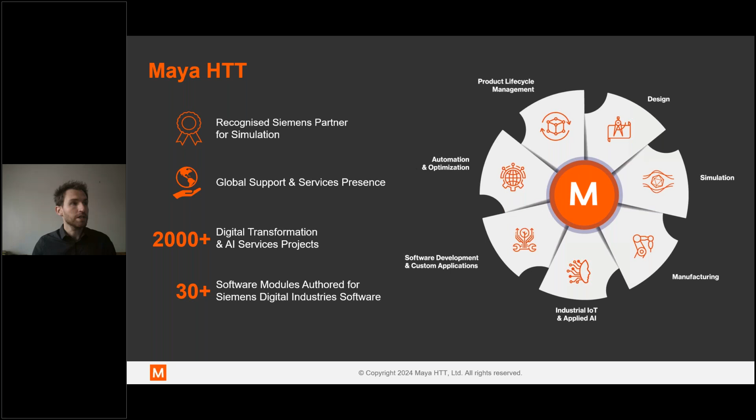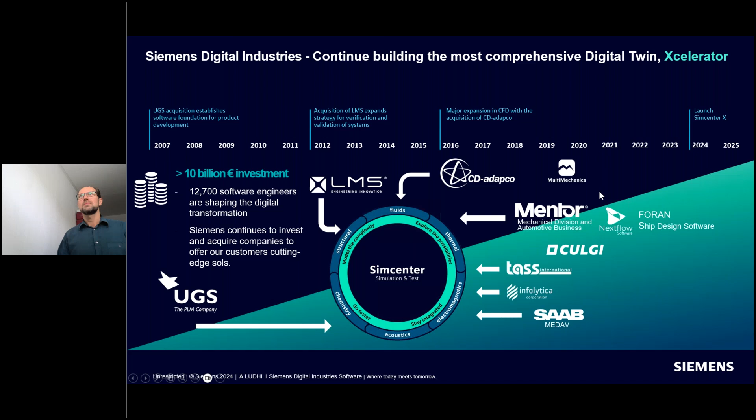For some reason it doesn't work. Let me see what I can do this way.

I would like to say a few words about the market trends and also the challenges of the maritime industry. So the first thing is about the global challenge that we experience in the maritime business.

In July 2023, the International Maritime Organization, which is the special agency of United Nations, committed to a new strategy. According to this strategy, by 2050 we have to make the entire global maritime industry zero emissions.

It's quite a significant technological change, because scaling up and using these new technologies for the entire global industry is not an easy task.

Just to illustrate this, if you ask yourself how many vessels are actually sailing on the planet at the moment, the answer would be about 100,000 vessels of gross more than 100 gross tons, and about 50,000 vessels with more than 1,000 gross tons.

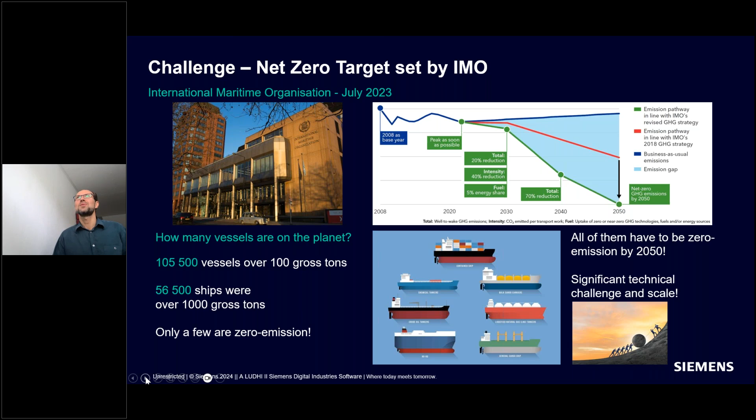At the moment, only a few of those vessels are actually zero emission. So it means in the next 20-25 years, it's going to be quite an interesting and challenging process to completely change the future of maritime business and update all these existing vessels and do something about this.

As you're probably aware, the general process of shipbuilding starts with the inquiry, and there are quite significant blocks which go all the way to the in-service support.

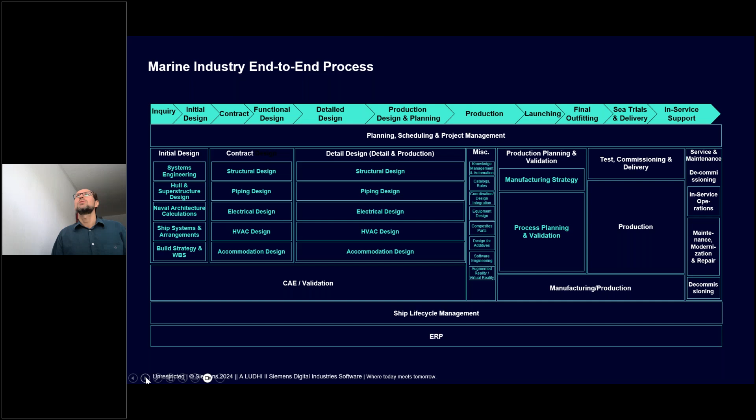Because digital technologies in shipbuilding were introduced quite some time ago, now for almost every part of this process - the initial design, the contract, the detailed design - there are some sort of software packages to simplify this kind of process.

Within the Siemens portfolio, we have all the tools needed for the entire process - for the PLM solutions, for the global overseeing of management processes, and also for the detailed design and simulation. So in that sense, Siemens is in a very good position, we can cover all the blocks of this process.

But probably the most important bit is actually to have the seamless integration between those components. It's not like pieces of software from different vendors, where you might be challenging to move a file from one piece to another. It's kind of an integrated, fully integrated approach.

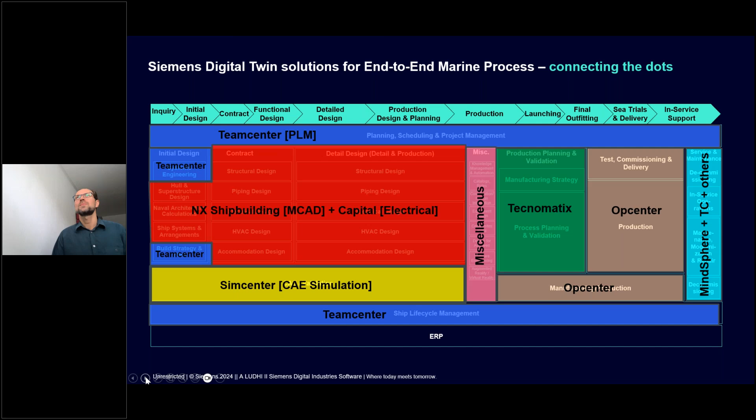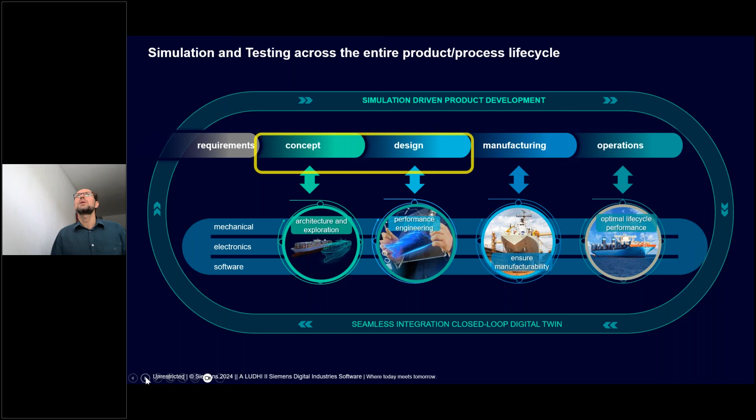If we just rearrange the same image in blocks, there are a few main steps: requirement, concept, design, manufacturing, and operations. In the simulation part, we mainly focus on the concept and design - that's exactly the area of expertise which could be used with the Siemens simulation portfolio.

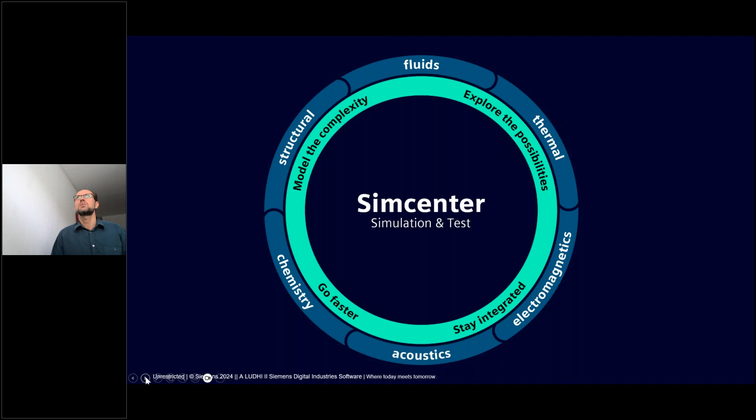This portfolio is specifically part of the Siemens solutions called Simcenter, and is mainly focused on simulation and test. This could be fluid dynamics - computational fluid dynamics simulation - it could be structural, thermal, or acoustic. All this part of the simulation process could be united in Simcenter.

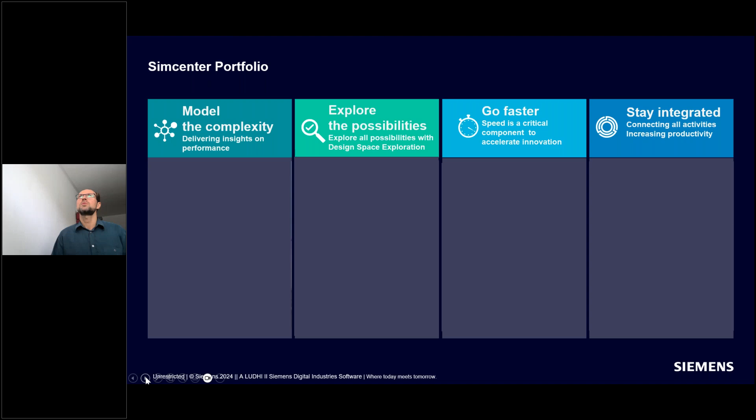We would like to highlight a few main blocks of this portfolio - why it's important to make the simulation process part of the shipbuilding process.

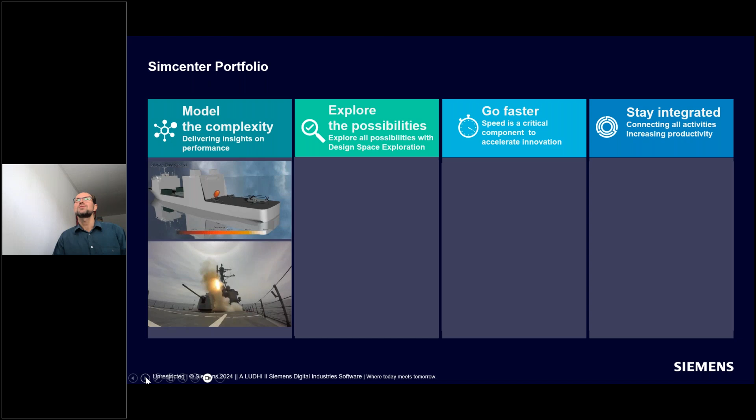The first one is modeling the complexity, because at the moment ships are not simple structures - there are a lot of things happening on the vessel, whether it's the hydrodynamic side, structural elements and so on. So it would be nice to have the opportunity to model this complexity in full.

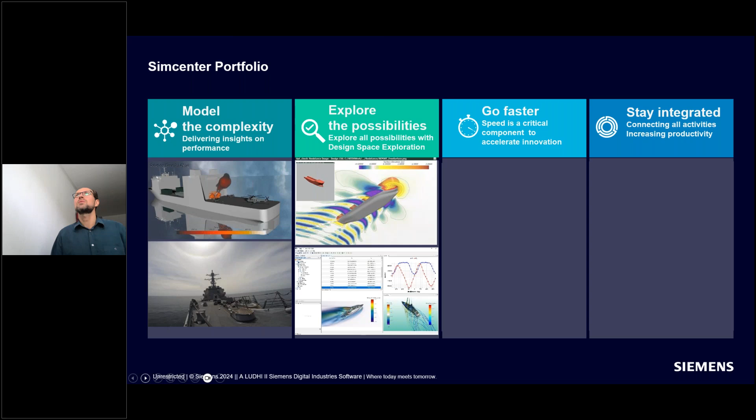The second bit is about exploring the possibilities. This is quite an interesting option for the optimization process - if you would like to have the optimization space and try to find the best possible answer or solution, either in the hydrodynamic side or structural response, and so on.

Another critical bit is being able to run your simulation in a reasonable time frame, because before, simulation could take days or even sometimes a week depending on the complexity. But for the design process, it would be nice to have those simulations delivered in a reasonable amount of time - that's why we have a significant focus on making our simulation robust and fast.

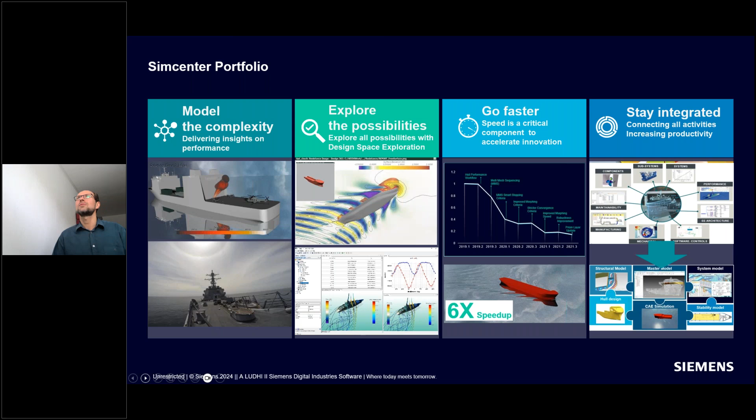This will definitely help engineers run the cases in a realistic time frame. The last important bit is about being integrated. There's opportunity to build the first geometry, for instance in NX, and then use that file across the whole portfolio of Siemens products. So you don't have the headache of converting files from one format to another. It's all connected and integrated, which makes the simulation and the entire process easier.

So that's in a nutshell what I wanted to say about the marine trend, and I'd also like to share a few customer success stories. One is DNV, the Norwegian Classification Society.

They are very good clients of ours, and they use Star CCM Plus to optimize the hull form. In one project they reported a 36% improvement in energy efficiency. That's a quite significant gain, and converting that to financial terms, it's about 3 million saved per year per vessel. So it's one of the opportunities for designers and owners to improve their designs.

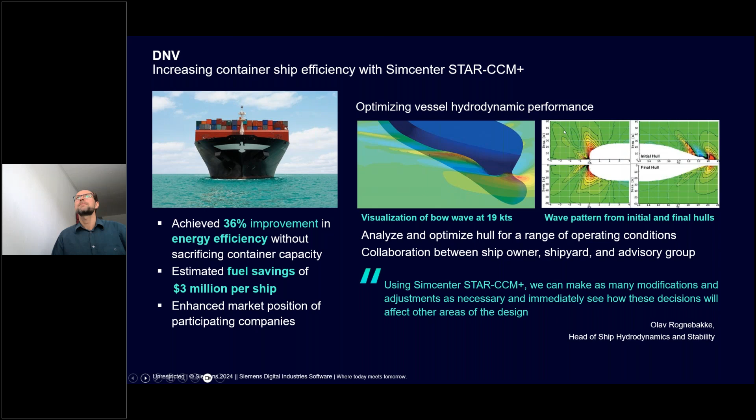The second test case is from Wärtsilä. They had a similar approach using Star CCM Plus, but their focus was not specifically on the hull form, but also the integration and interaction between the hull form and the propeller.

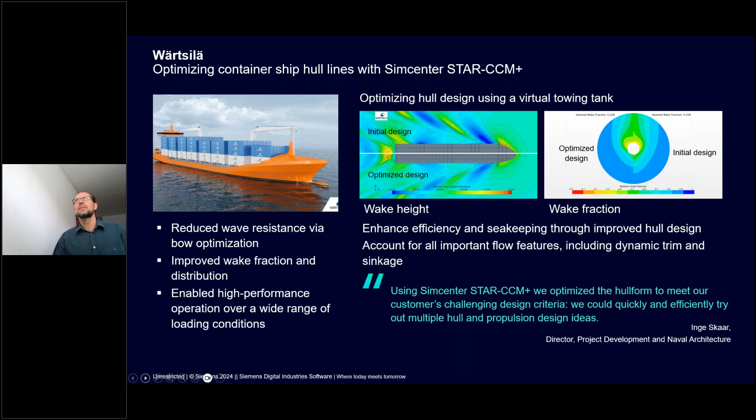It's very important to find the right hull form and propeller together, to get a very good wake fraction, or the wake behind the vessel, to make sure the propeller operates in a favorable condition. So their focus was not only the hull form, but also the integration, running the simulation together with the propeller.

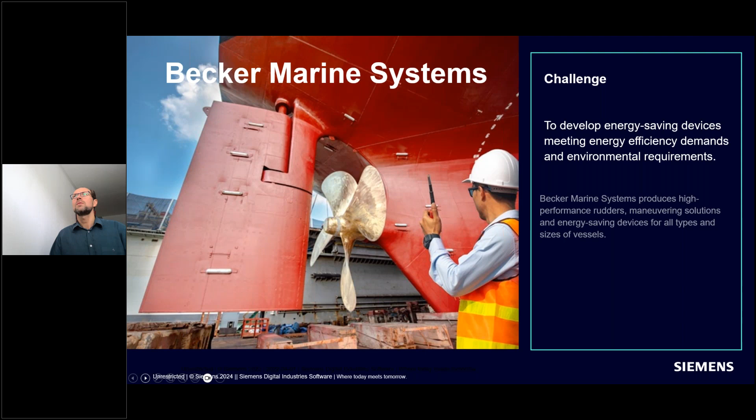Finally, one of the test cases is Becker Marine Systems. They are a very famous brand and company that designs the Mewis duct, a special energy-saving device installed in front of the propeller, which makes the flow coming to the propeller a bit more uniform. By doing that, you can make significant savings in the propulsion system.

As reported by Becker Marine, they achieved quite significant savings, about 0.5 million per vessel for fuel. That's also quite significant, taking into account the small installation time for this unit. We could share a lot more success stories, but we're limited on time, so I'd like to focus on these three I mentioned.

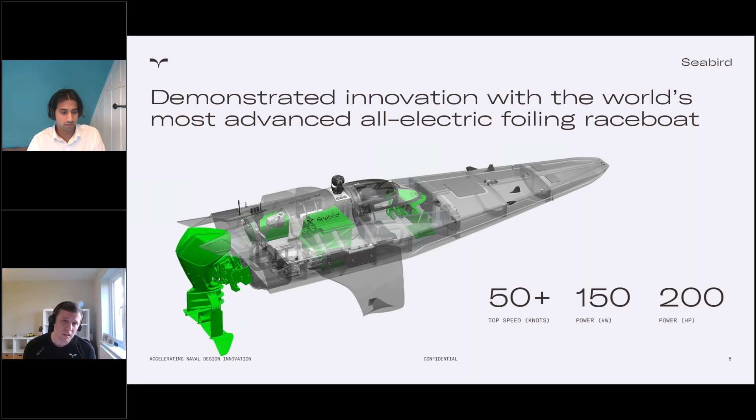It utilizes our 150 kilowatt power unit alongside cutting edge foiling technology to deliver a highly efficient, high performance race boat. The success of this project highlights our team's ability to innovate. Next, we have a little snippet of the Racebird in action, taken at a test site in Italy on Lake Maggiore.

I'm hoping that came through okay. That should have given you an idea of the speed at which the Racebirds perform. And it's our responsibility to make sure that the design can withstand those harsh conditions experienced during racing.

In order to do so, we have to leverage state-of-the-art tools available to us. This outboard engine and foil system is a critical component of the Racebird. Using StarCCM+, we were able to simulate its performance across a range of speeds and turning angles and establish worst cases. We can then analyze those worst cases in more detail to feed into other disciplines, such as providing pressure maps for structural analysis. Iterating through that process has allowed us to develop robust design solutions without compromising hydrodynamic performance.

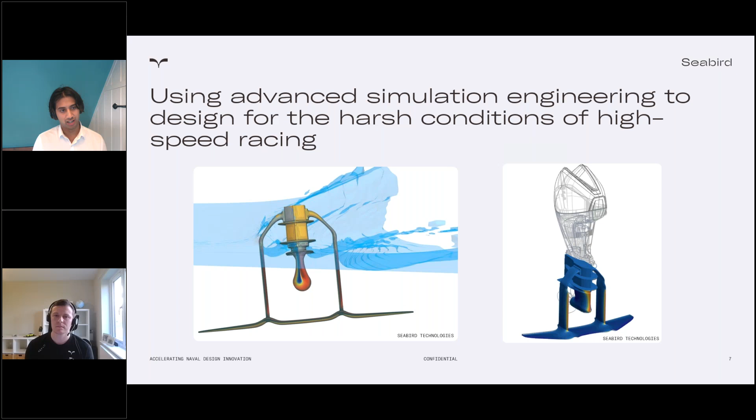Another way we're developing new technologies is through the various Innovate UK projects we've won, partly funded by the UK government. We're working closely with many commercial and academic partners on a range of topics, such as Project Osprey, a UK-Germany bilateral project where we're working with Hacker Motors and the University of Cambridge on developing electric foiling propulsion systems.

Optima is our longest running Innovate UK project, and given its focus on efficiency, has relied heavily on CFD simulations. For Optima, we have simulated a real-life vessel in full scale and been able to validate our results against sea trial data to a high level of accuracy. As you can imagine, a validated simulation has proved invaluable for the development of our project, ensuring that any design changes we make will perform on the vessel with confidence.

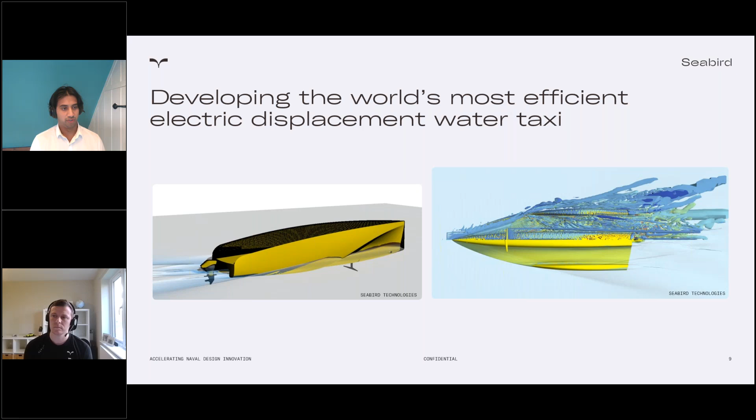At the same time, we're able to control wave conditions and wind speed that we can't control during sea trials. Being able to control where we have the complexity and where we want the simplicity is what makes it a great tool for research projects.

So we talked about the Racebird and the research we're doing, and it's that racing expertise and technical insight that we're using to develop our very own line of commercial products. We're very excited to announce that we will be revealing our first concept product at METS in Amsterdam later this month, which we believe to be the beginning of the next generation in electric systems for the marine industry.

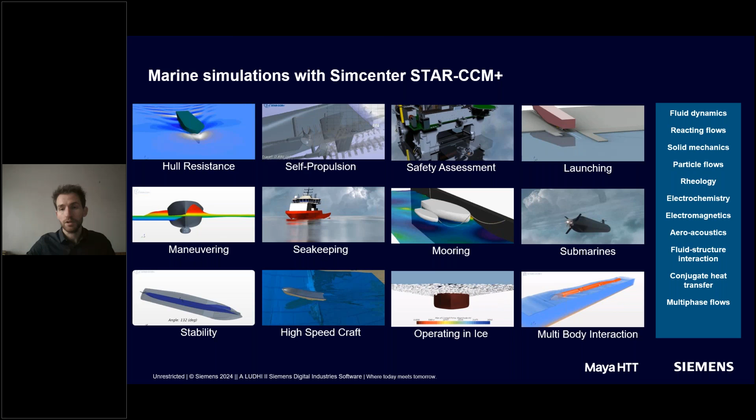As you've understood, StarCCM Plus is our 3D CFD multiphysics tool, which means that you can model quite a wide range of applications. If we focus on the marine industry, that means maneuvering, seakeeping, submarines, high-speed craft, multi-body interactions, etc. There's a wide range of physics, as you can see on the right-hand side of the screen.

Which does allow you to model even more physics and applications in different industries, as you can imagine. If we focus back on the marine industry, we're going to talk about 4 different things here: the standard simulation workflow to model a marine simulation. If some of you know CFD and have used a commercial tool before, you'll be very familiar with that.

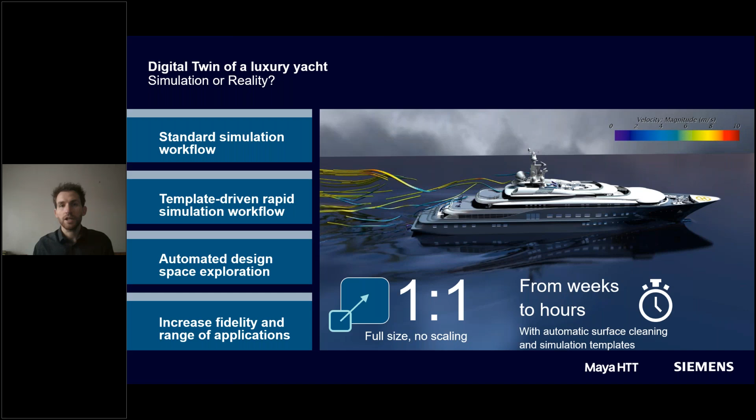Then how you can actually leverage the templating in StarCCM Plus to automate your workflows. Once you've automated it, you can go further and explore your design space and try to optimize and find better designs faster. And then the last point, but not the least, if for some reason you need increased fidelity, for design gateway or for validation and correlation purposes, we'll see how you can also do that in the tool.

Right, so let's jump into the CFD workflow. No surprise there, the first step is the CAD import. We support a wide range of CAD formats in StarCCM+. From there, you have to clean your CAD to make it CFD ready, so you have to get rid of self-penetrating faces and make sure it's watertight, for example.

Once you've done that, you can specify your mesh settings and generate it, check it, make sure it's of high quality. Then you can select your physics solver, your boundary conditions, and you're ready to submit and launch your calculation. The calculation is fully interactive in STAR, meaning that you can check for convergence and monitor your results as the run is happening.

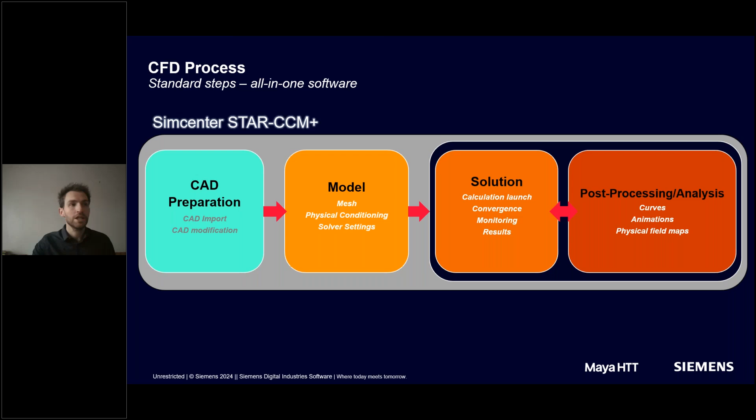Then we arrive at the most important step of the process, which is the post-processing. So where us engineers actually earn our money, because you're supposed to have a look at the results, identify an area of improvement, you come back to the geometry, you make a change, and you rerun the simulation.

So let's see in STAR how that fares. Here we are in the parts tab, where you essentially import your parts and you clean them. Then you define your mesh settings in the mesh operations here, so whether it's a surface mesh, a volume mesh, a boundary layer mesh, and you'll notice quite a few default controls to control the mesh sizes absolutely everywhere within your domain.

So don't be scared by the amount of controls that you can see here. You actually only need to define them once, because they're defined in the operations tab, meaning that you can actually rerun them seamlessly once you've defined them.

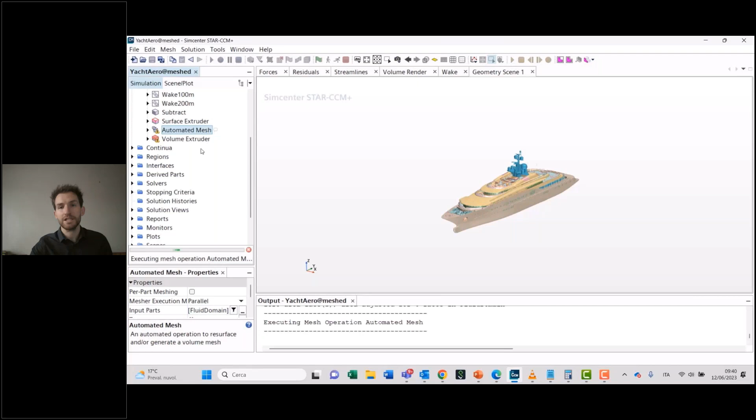From there, you can very quickly create a scene which allows you to visualize the mesh that you've created. So you can potentially create a plane section and have a look at your geometric features, your flow features. In this case, you can see a boundary layer mesh around our hull to make sure that we've captured that correctly.

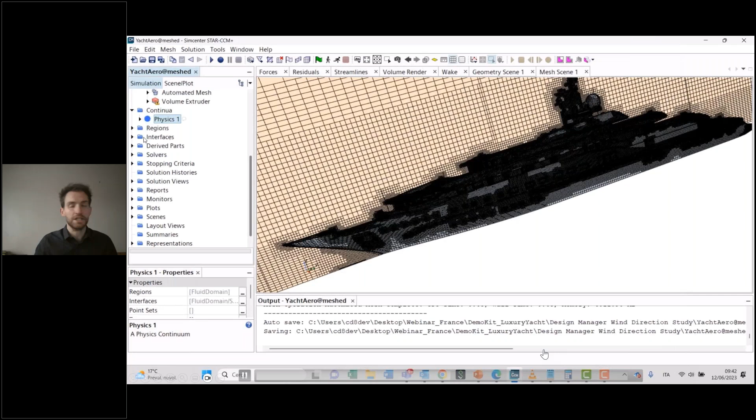Then we move on to the physics solver, so everything happens in that window. It's very easy to tick boxes and select your turbulence model. Is there going to be heat transfer or not? Is that going to be a steady state or a transient? Is that going to be a 2D or 3D case?

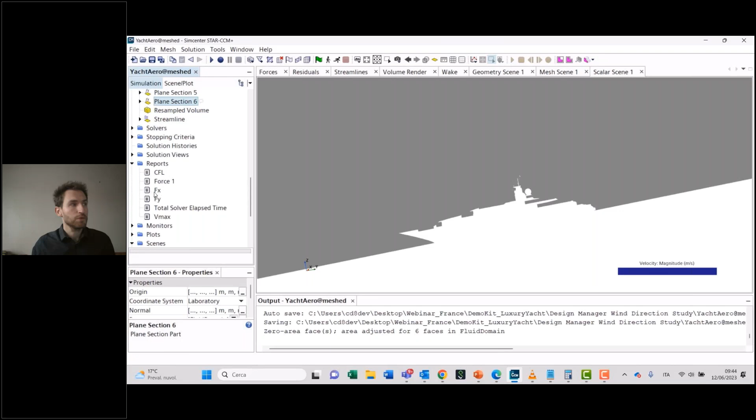We then move on to our regions tab, where we can specify our boundary conditions. So here we have a velocity inlet, a pressure outlet, and a few walls for our geometries. Just before submitting our calculation, we're actually going to do our post-processing first, because the solution is interactive. So it makes sense to realize if something is going wrong at the start of the case, rather than running it fully and realizing that you have to start from scratch again.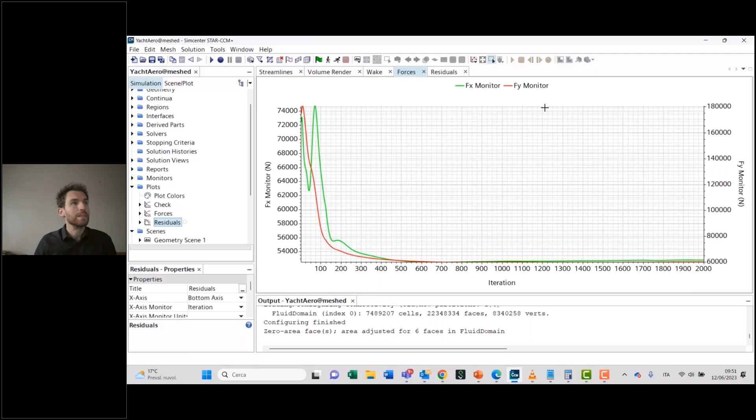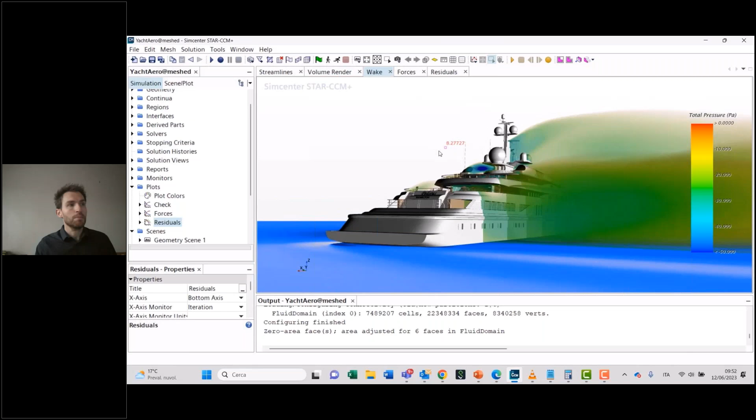Once you've completed your run, you can see on screen a few capabilities in terms of post-processing for STAR, including streamlines, advanced rendering, and ISO surfaces, which give you a fully comprehensive view of what's happening within your case. You may be presenting these results to people who are not CFD experts, so you need to make an impact visually and pass on the message easily. That's what StarCCM+ is really good at as well.

There is one area of the process we've not really covered so far, which is pre-processing. That process can be very tedious, especially in the marine industry, because most customers receive a Rhino part from their suppliers, and this part is very often not the cleanest. Therefore, you have to spend a lot of time manually fixing it yourself. What we've come up with at Siemens is the surface wrapper, which allows you to automate geometry preparation. Let's see how you do that in STAR.

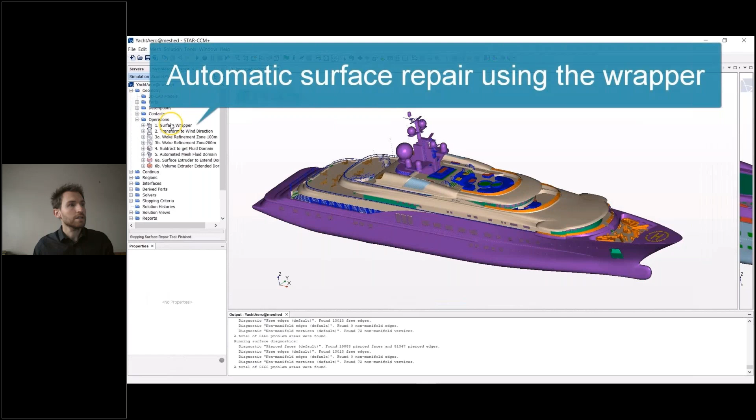You come back into your parts. This time you go into the repair surface tool, which is a pre-processing tool to check for errors in your geometry. Here we're checking and identifying self-penetrating faces, free edges, non-manifold edges, and vertices. We're going to create a new operation in our set of operations called surface wrapper, and we generate a wrap of our surface.

Here we're comparing on the right-hand side the wrapped surface versus the original geometry on the left, and you can see that we've generated a very high quality surface on the right. We can then leverage the deviation distance field function to check how far away the generated wrapped surface is from the original surface, and you can see that it's of very good quality.

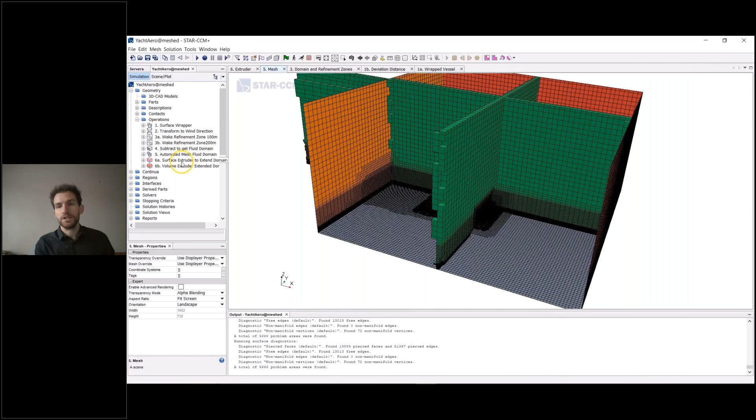From there, we move back into our standard simulation workflow. We generate our surface mesh to get very high quality triangles, and then the volume mesh, and then you're ready to set up your boundary conditions and physics solvers from there. So this is how we automate the workflow in terms of pre-processing the geometry. And then how do you actually save that as a template?

Every customer that's got StarCCM Plus has the opportunity to create its own workflow and save it as a template, then distribute it across your organization. But there are certain templates already prepared by Siemens and available on the Support Center website.

One of them is the virtual tow tank template, which is a template to run a hydrodynamic resistance simulation in flat water. In here, you're going to get the resistance versus your speed, and this is how you're going to do it in the software.

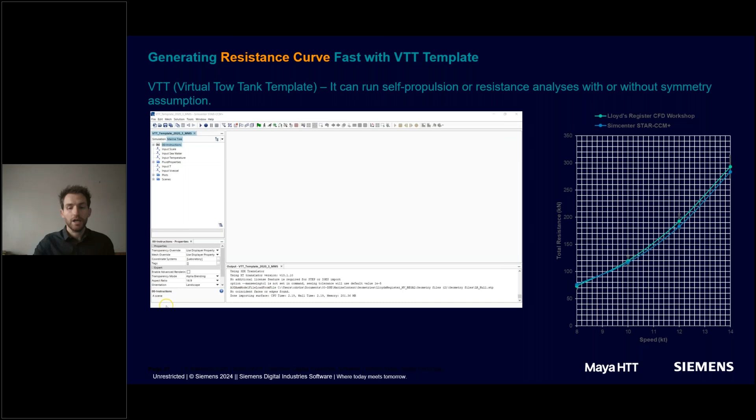So you start by importing your geometry. You will have it displayed on the graphics window on the right-hand side, so you can check for any errors. Then there are only a few parameters to enter, such as the draught and the velocity of the vessel. You can also modify the parameters of the water, so the temperature, density, etc. From there, you just need to click Run.

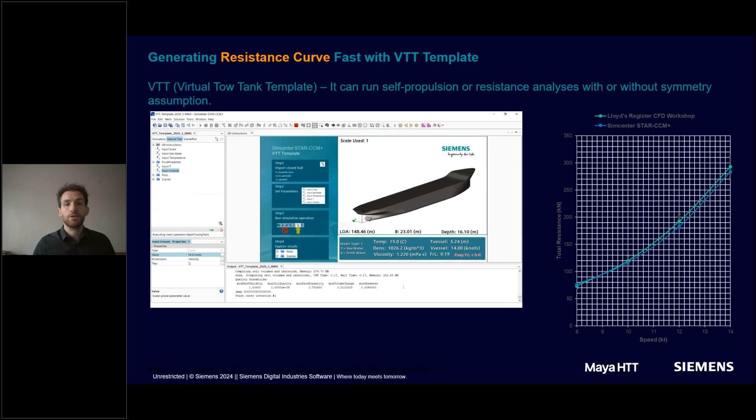For those of you who know StarCCM Plus, you'll notice we haven't run the usual Run button. We've clicked on Simulation Operations. Simulation operations are a great way to automate your workflow because they allow you to define pre-processing activities, post-processing setup as well, and everything happens in the background. As you can see, we just clicked on that button and the case is running converged, and you can see the post-processing views we can obtain from such a template. As I mentioned, you get your resistance plot as well as the resulting motion of the ship.

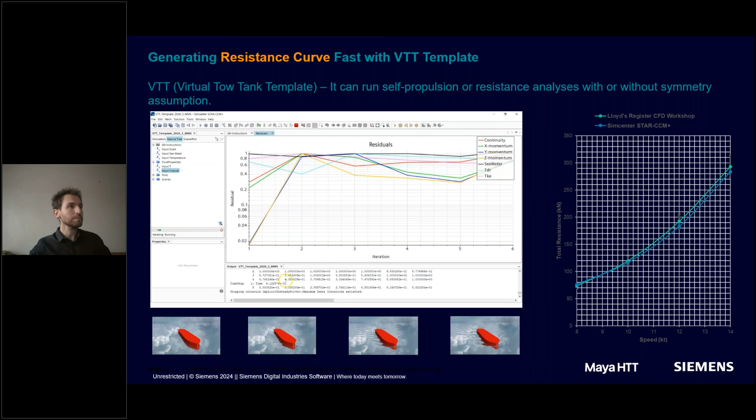There is another template as well, called the Propeller Open Water template, which allows you to import your propeller in open water. You have a few parameters to tweak, once again diameter and RPM, and using the Design Manager in StarCCM Plus, you can run a parametric study to get your propeller curves, which is obviously very important for propeller engineers. Here we're talking about thrust, torque, and efficiency, which are obtained very easily using that tool.

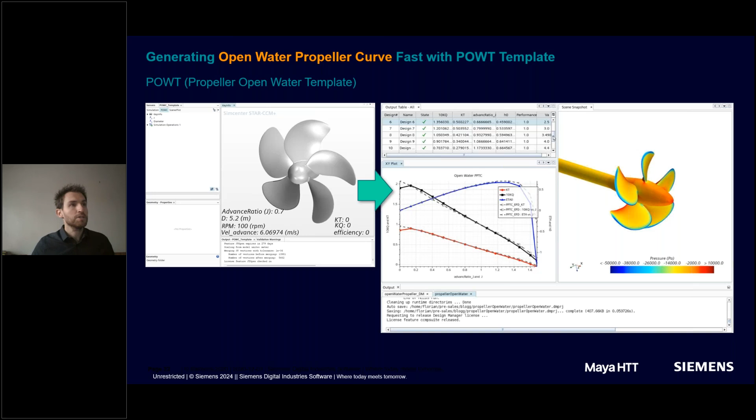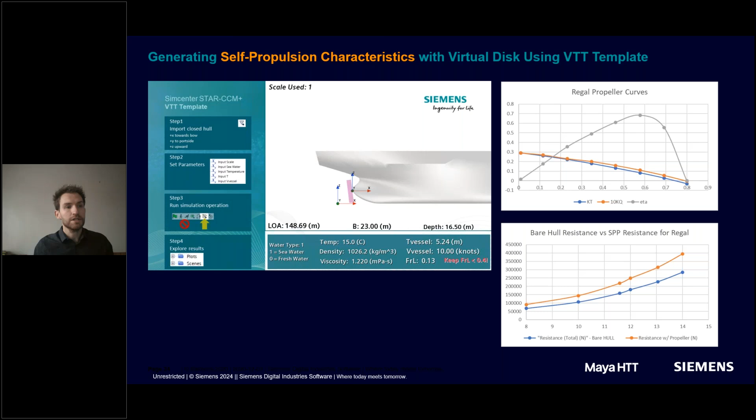We're back on the VTT template, but there's new functionality added this year which allows you to create a propeller implicitly using a virtual disk method. We're not importing any propeller geometry, but creating and defining that pink cylinder on screen, then importing a CSV file for propeller curves, which creates a momentum source term replicating the propeller's impact. Running the template as usual, we get our resistance curve, slightly increased with the propeller, as you'd expect due to its impact on the flow.

Moving ahead, so far I've just talked about flat water simulation, but you can obviously simulate waves as well. We've got initial conditions named VOF waves, which allow you to define linear or non-linear waves in your case. You can also go further and do maneuvering analysis by defining a trajectory, due to rudder or propeller effects, and that's what you can define in StarCCM Plus as well.

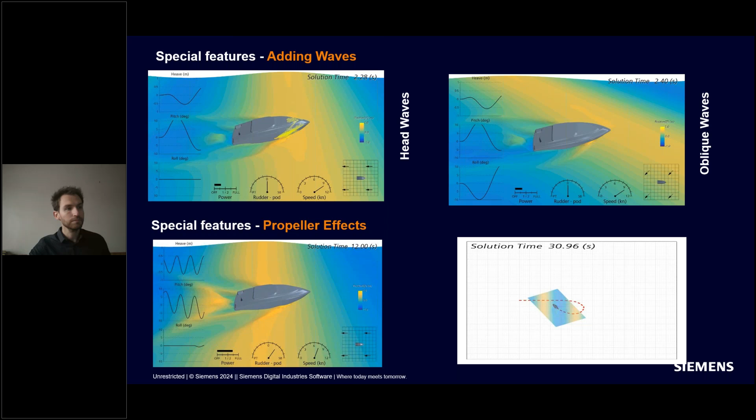Moving on to design space exploration, there are two things to talk about: the Design Manager, which I've already talked about, where you can do parametric studies, and the Sherpa algorithm, our optimization algorithm embedded in StarCCM Plus.

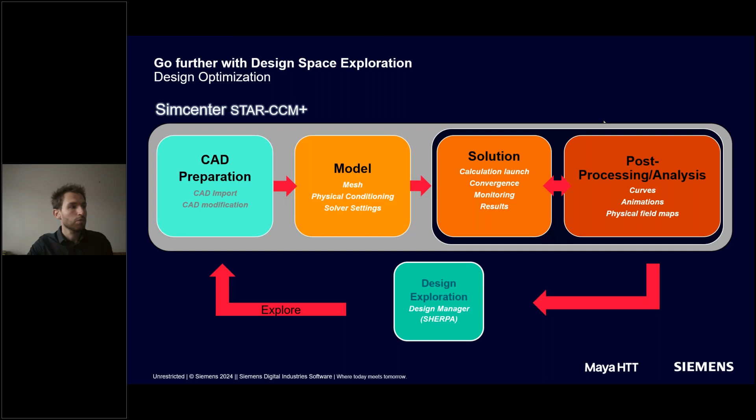If we go back to our previous workflow, a marine or CFD engineer would normally look at his results, go back, make a change to the geometry, and rerun the case. You can forget about that with Sherpa. Sherpa looks at your objectives, sees what parameters you have, and finds the better design for you based on the algorithm, which greatly increases the speed at which you can find better designs.

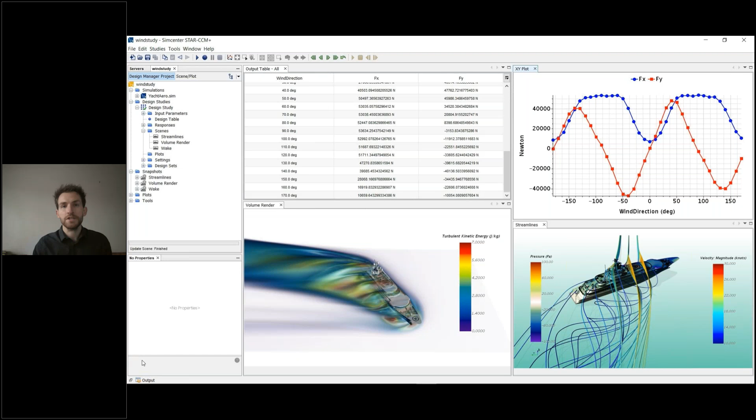If we look at how that looks in StarCCM Plus, you've got the Design Manager, where we're running a parametric study using a simulation parameter, the wind direction, running different angles of attack. The view is fully interactive, so all the post-processing views update in real time. We can use three different parameters in the Design Manager: simulation parameters, mesh parameters if you want to run a mesh independency study, and geometry parameters if you want to run a geometry optimization using Sherpa, for example.

And that's what we're doing next. Here we're connecting NX, our CAD tool, with StarCCM Plus, in order to leverage the parameters and geometry directly transferred from NX, which allows us to get a much more complex geometry parameterization, as you can see on screen.

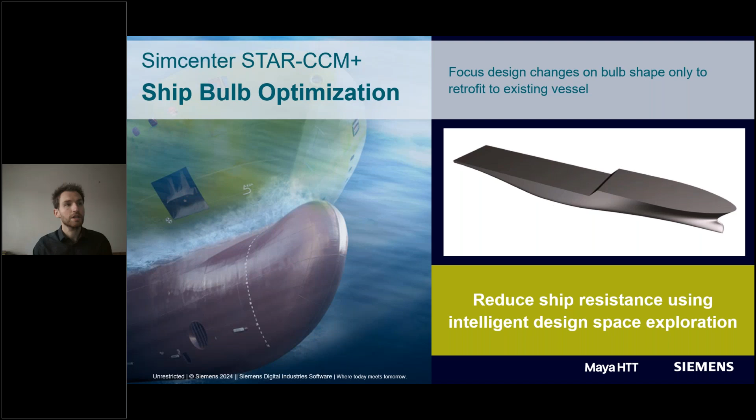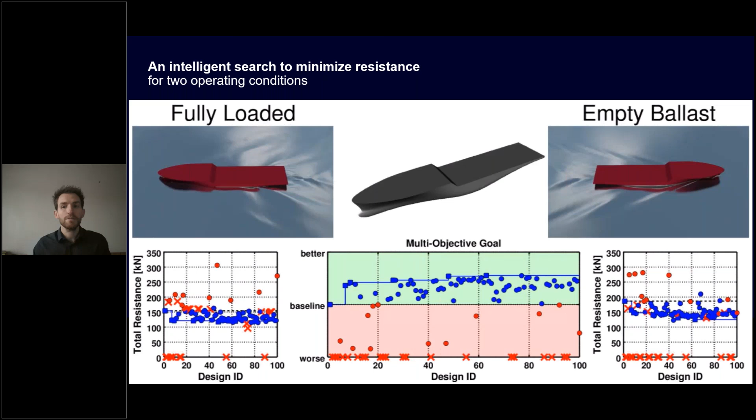Here we use the Sherpa algorithm in the Design Manager to define two operating conditions and tell the algorithm to minimize the total resistance for a fully loaded operating condition and an empty ballast operating condition, meaning the algorithm has to find a good compromise between these two conditions, and that's exactly what is done. It's as simple as that: you define your objectives properly, you have your parameters in the case, and Sherpa does the job for you. That's what is found in the end.

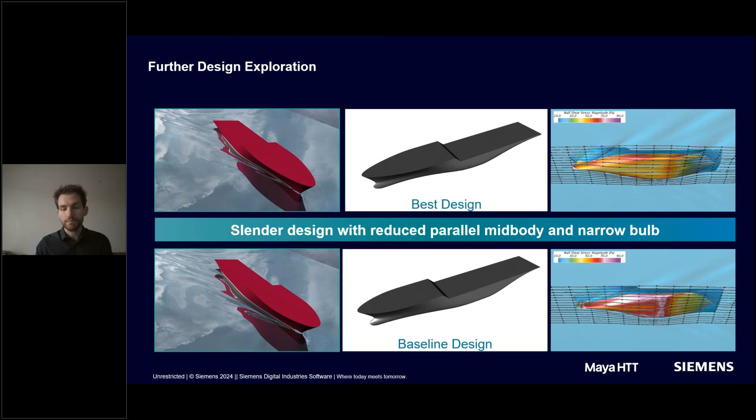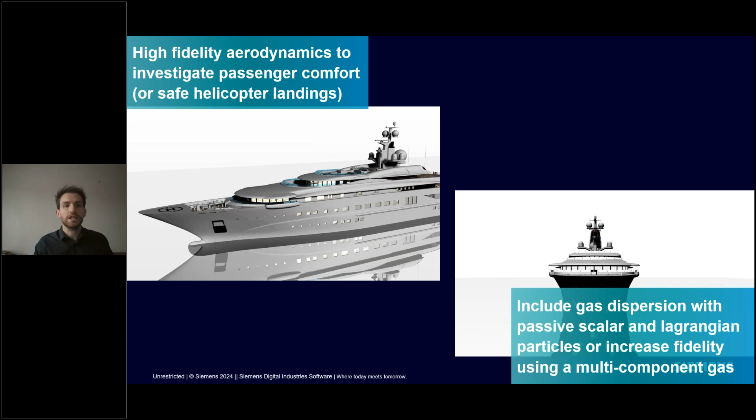Moving on to the last section, if you want to increase fidelity for specific applications, such as a specific design gateway, certification activities, or a correlation activity or validation versus a prototype, you're not necessarily going to use the same physics model we've used so far, where we talked about optimization and running hundreds of cases. If you consider an aerodynamic case, you're going to run a RANS simulation, but that's not necessarily the case if you want increased fidelity.

In that case, you can leverage LES and DES models available in StarCCM Plus to do that. You can also leverage some of our Lagrangian multi-phase models to track emissions and particles if that's of interest to you.

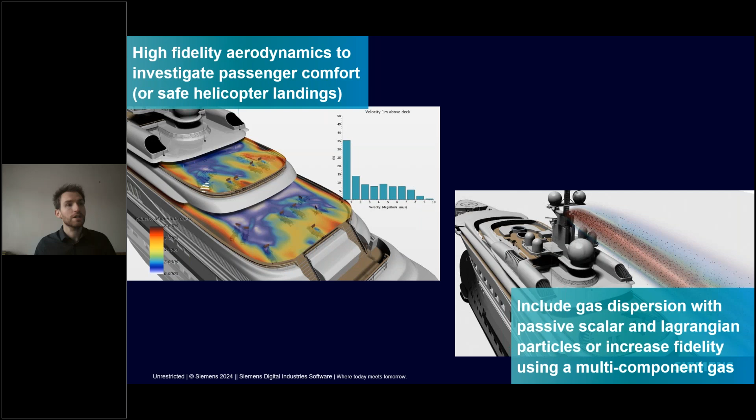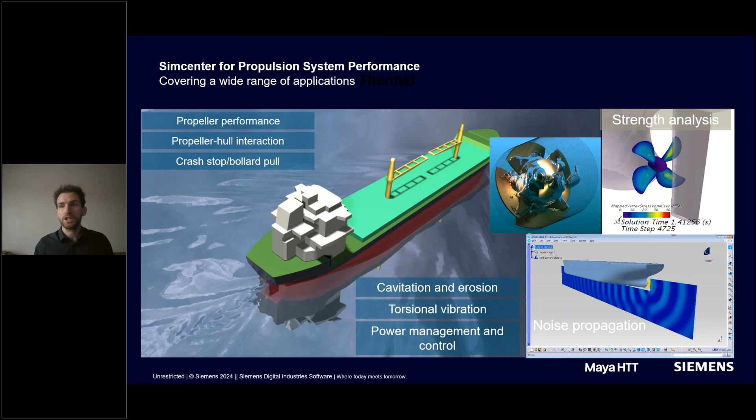One more set of capabilities in the tool is the multi-phase model that allows you to model cavitation. Cavitation is a big concern for propeller engineers for three reasons: performance, durability and structural aspects, and noise. We have a structural solver in StarCCM Plus that you can leverage, using fluid structure interaction models to get the deformations and stresses of your propeller due to cavitation or the surrounding flow. We also have a hydroacoustics model in StarCCM Plus, which allows you to get the noise generated by the propeller and its propagation in your domain.

So that concludes everything I had to say on the StarCCM Plus section. We went from looking at how you simulate your workflow in StarCCM Plus, to how you can use the templates-driven approach to automate it. Once you've automated your baseline as a template, you can use design space exploration to go further. And we have a wide range of applications and increased fidelity models if needed.

Darius, I'll pass it to you on the AMESim side.

Okay, hello, thank you Cyril. Can you hear me? Yep. Good, so I take it from here. As Cyril mentioned, my name is Darius. I'm Darius Piuro, systems simulation specialist at Maya HTT.

In this part of the presentation, we will see how SimCenter AMESim can help us with analysis of ship propulsion systems.

Sorry, Darius, I think you're muted. Sorry for that, something has changed. Can you hear me now? Yeah, we can hear you.

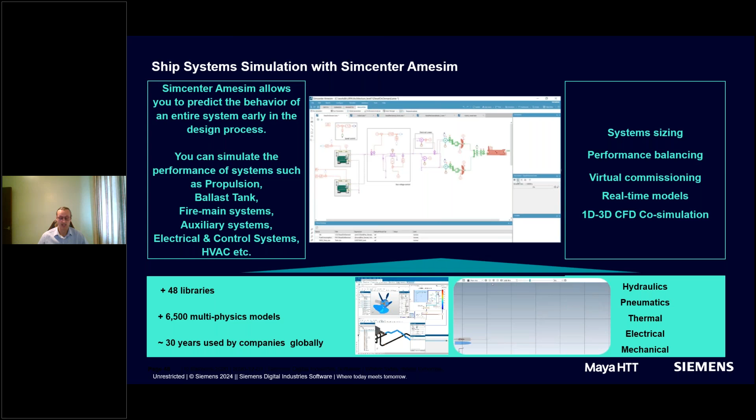Generally speaking, AMESim models can be run in real time. What does that mean? It means those models can be used for software development, like model-in-the-loop or hardware-in-the-loop type of analysis, when we can link PLC code to an AMESim model representing the plant, and then virtually commission that PLC code. This is how powerful AMESim is. As we will see later, we can leverage a CFD environment, in this case StarCCM Plus, and use results of CFD simulations using AMESim, or link directly to CFD.

Let's see in this simple AMESim model example how it looks like. The blocks are intuitive. I suppose you can see right away that on the left we've got the ship, and on the right we've got the weather conditions, so sea and wind. Around those two blocks, we build the other components.

Moving from the ship, you can see there are 3 propellers powered by electric motors. They are connected to the electrical grid. On that same electrical grid, we've got the battery and 3 generators powered by internal combustion engines. So this is a hybrid propulsion system, where you can power the vessel from engines without the battery, from the battery alone, or from the battery and the engines together. This level of the model in AMESim is performance-based, so we've got performance tables for the engine, generators and electric motors, and you can plug them in and see how the system performs, how much power is required, fuel consumption, and so on.

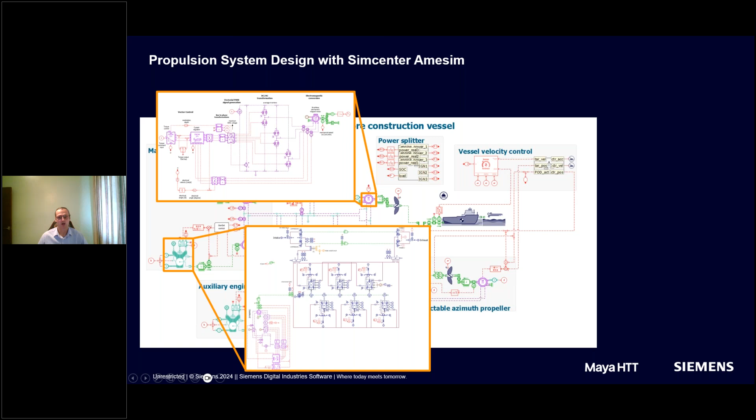But in AMESim, we can also go one level deeper into the components' design. For example, if you know the physics of the electric machine or the design of the engine, like piston, stroke, and so on, you can affect those parameters and see how they affect the whole system design. This is a very powerful tool for analyzing the impact of a single component on the whole system. In this specific application for ships, we've also got sea routes, so we can have a particular sea route with a solution for a known ship or design ship with the propulsion systems of interest.

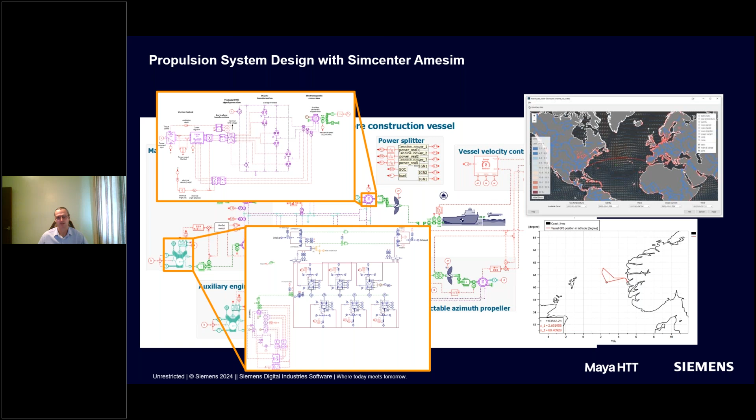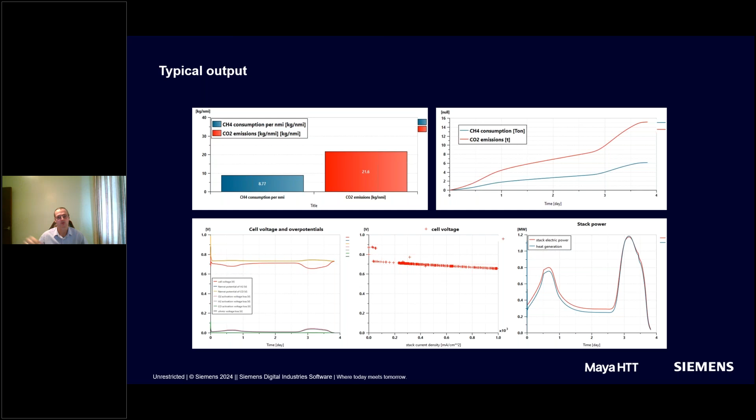And then you can analyze how the ship will behave across this sea route. This slide shows how we analyze results from AMESim, mainly by plotting them. On the top row, you can see the same information about fuel consumption and emissions, but one is expressed as total over the trip, and the other is cumulative versus time. You can see that fuel consumption is rising during the trip.

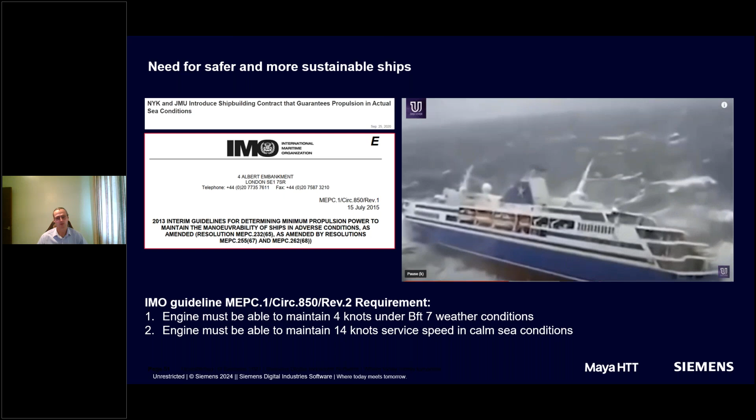The International Maritime Organization gives some requirements for the ship to meet two conditions: it has to be able to travel at 14 knots in calm water, and it also has to be capable of doing 4 knots in adverse weather conditions like Beaufort wind scale 7. So how do we make sure our design meets those requirements?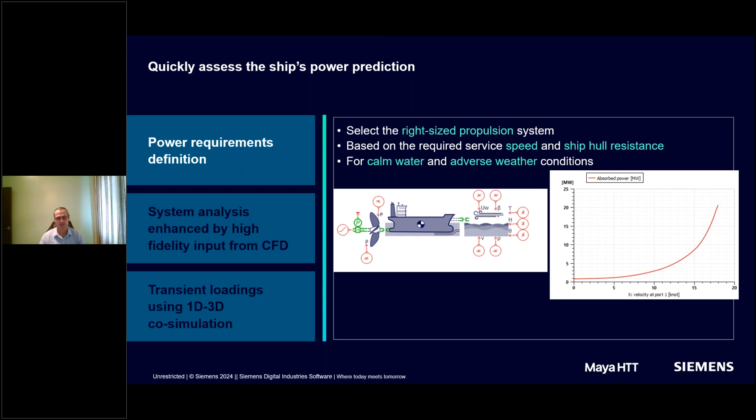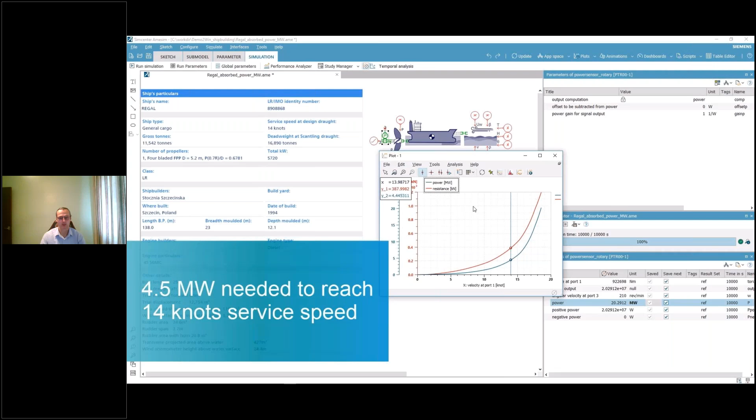We can use Amesim exactly for answering those questions. We can size the propulsion system and analyze it based on the simulation results. In this simple model, we've got the ship, propeller, and weather conditions, and we control the propeller speed, which in turn controls the vessel speed. We make sure this vessel is traveling at 14 knots, using the statistical hull resistance model, and the outcome is that we need about 4.5 megawatts of power at the propeller.

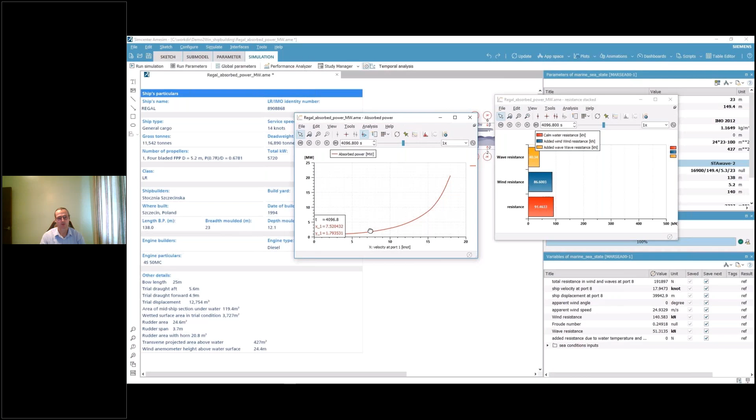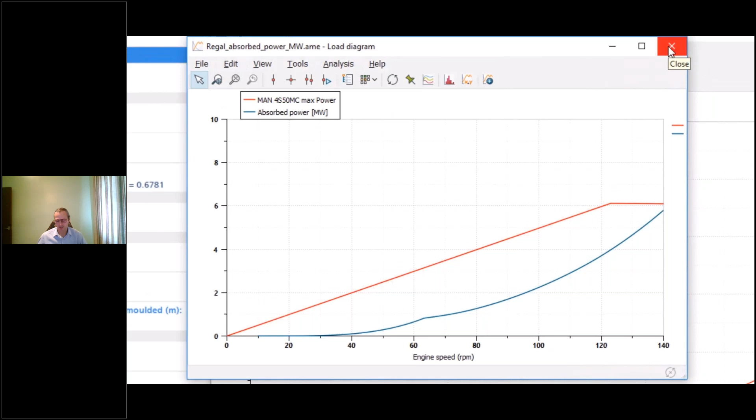If we know the candidate engine power curve, we can compare this power curve, the red line here, to the actual simulation points for 14 knots in calm water and adverse conditions. This gives us a very quick understanding of whether this power system will do, so we can make the right decisions at the very start of the project.

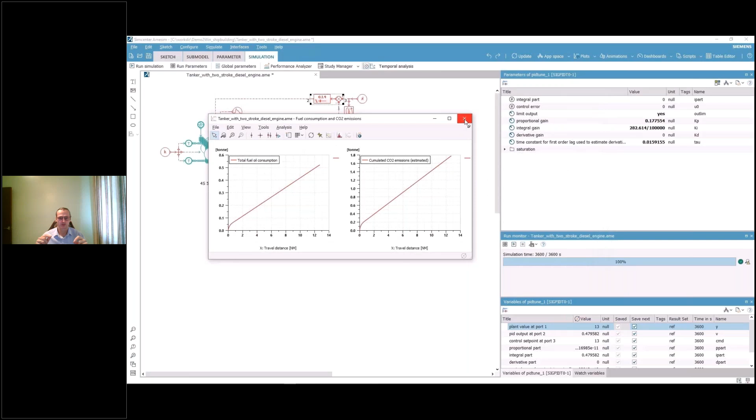As the project advances, as my colleague Cyril explained, we'll have a lot of iterations in the CFD environment, generating a lot of data from this simulation tool, and you can bring it along to Simcenter Amesim. In this model, you can see we expanded the previous model by adding an engine. So we've now got engine performance maps that we can use for analysis of fuel consumption, emissions, and other important information. We'll also do a comparison between a statistical hull model built into Amesim and the hull resistance model coming from CFD.

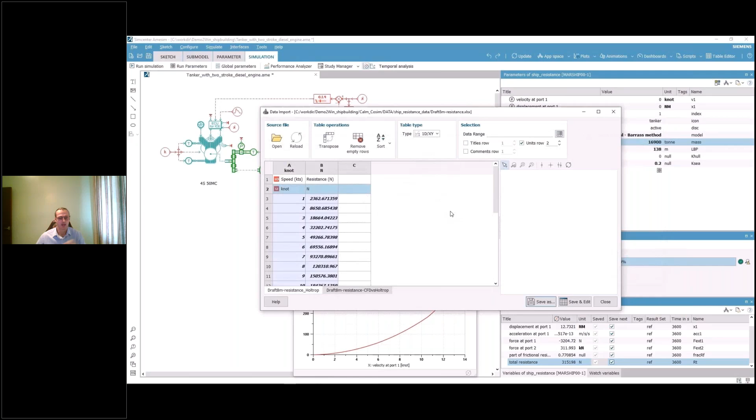You remember from Cyril's slide there was speed versus resistance information. We basically bring this information into Amesim in the form of a table with two columns: speed in knots and resistance in newtons. This is how we reuse information generated by the CFD environment within Amesim. Again, with just a few clicks, you've got both the statistical hull and the more high-fidelity information from CFD compared against each other.

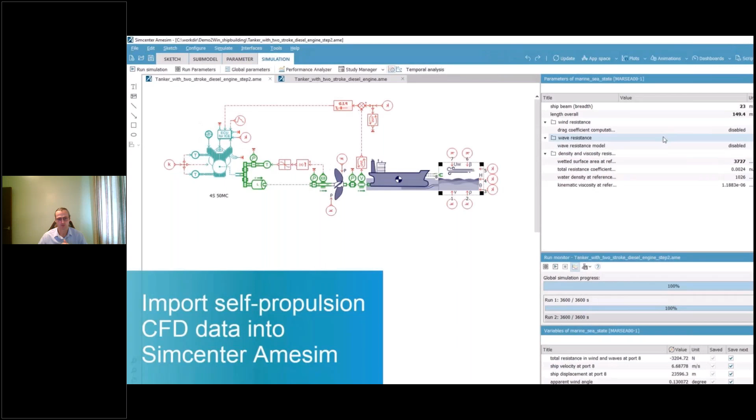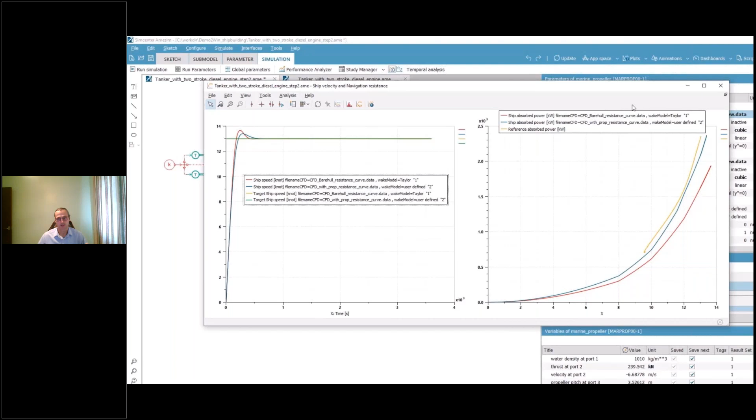You can do much more studies. For example, you've got self-propulsion system resistance coming from the CFD environment, and you can plug that in as well. You can do batch runs, benchmarking between different solutions, and again very quickly on graphs compare how those different resistance models impact system performance. So you've seen how easy it is to combine powerful CFD information with quick simulations in Amesim.

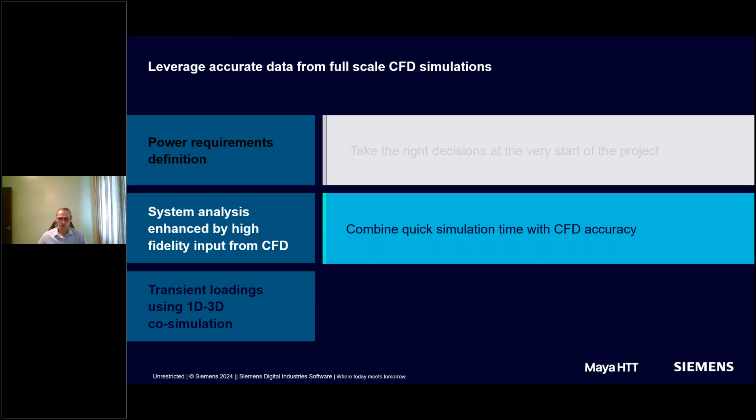And that's not all. We can go one step further: if you take the high-fidelity model in the CFD environment of the ship, hull, and propeller, and a very high-fidelity, accurate model of the propulsion system or any other system within the ship in Amesim, you can link them together. We link two simulation environments using something called the functional mock-up interface, which allows two-way information exchange between them, enabling effective holistic simulation of the ship.

As you can see on this animation, the ship is going through some dynamic waves, and the dynamic waves will impact the power that the propeller is exposed to. That will propagate back to the engine, so we can understand how the engine will be loaded, the torque load on the engine. And parallel to that, if you've got auxiliary systems and any other systems on the ship as well, you can understand the full picture of the ship performance by running two tools in parallel.

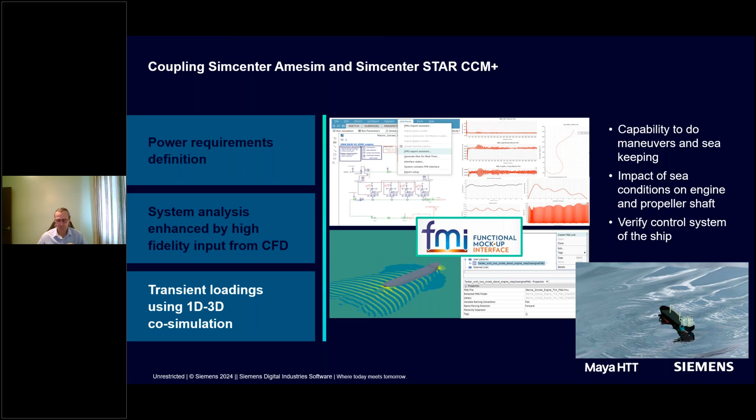So in a quick summary here, you can see that simulation assists and helps the project from the very start, so you don't have to wait for the project to advance. You can take ahead of any information.

We can use simulations to predict system performance based on our best knowledge or previous experience and so on. Then when the project advances, we can leverage the fidelity of the models by using more accurate, high fidelity data coming from the CFD environment and bring them into Amesim. And then, if you want, we can link the two tools together and run a really high fidelity model of the ship from a holistic point of view.

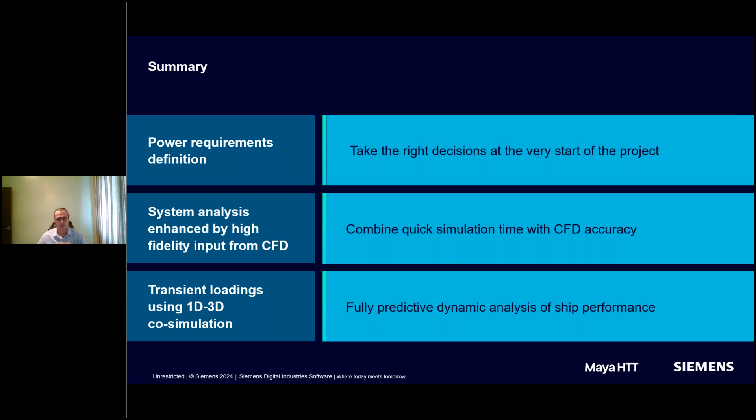I think this is all on my side, so I'll give it back now to Cyril.

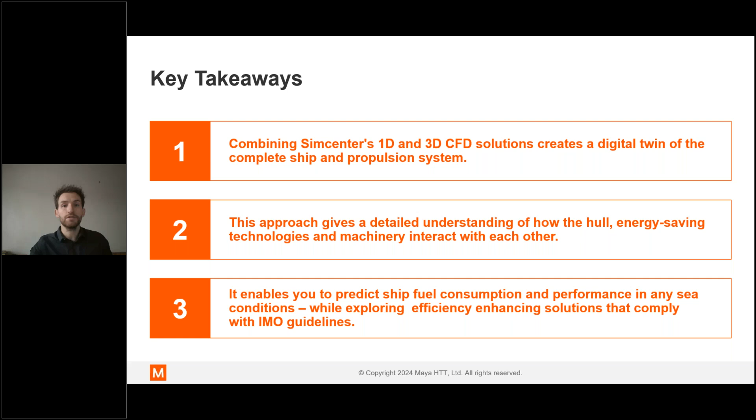It should also help you predict ship fuel consumption and performance in any sea conditions, whilst you can even go further and run optimization in some cases when needed, in order to make sure you have a solution that fully complies with any guidelines or regulations out there.